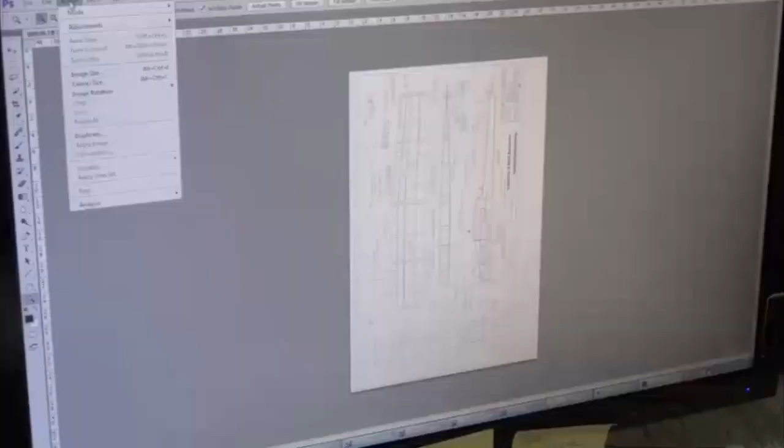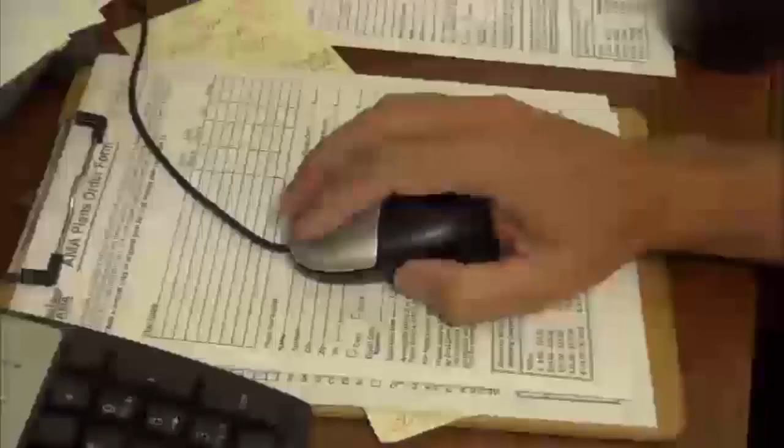After one final inspection, Greg includes any supplemental materials, such as this build article from Model Aviation. The plans are then rolled and packaged for shipping.

Great video, Greg. Tell me, what else does the AMA Plan Service offer? Thanks, Jay. We can do reductions and enlargements of plans. We can also do reverse plans. If you only have the right wing half on your plans, you can reverse it and put the left wing on there also. We also do plans repair, or we can do reconstruction of a set of plans.

Plans are in an archive, so we have a lot of experience. We also have access to the Model Aviation Museum library, which has thousands and thousands of old magazines we can pull the articles from and reprint them with the plans.

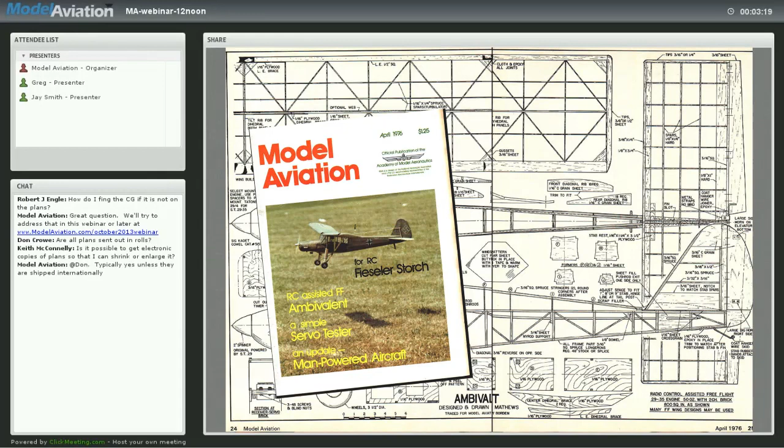One of the questions that I see here online is, how do I find the CG if it is not listed on the plan? CG is usually circled. It's like a round circle that's in quarters. That represents a range of CG to the lead edge and to the trail edge of that circle. If you're in that circle, you're good to go. Thanks, Greg. Let's get down to your presentation on how to select a good set of plans.

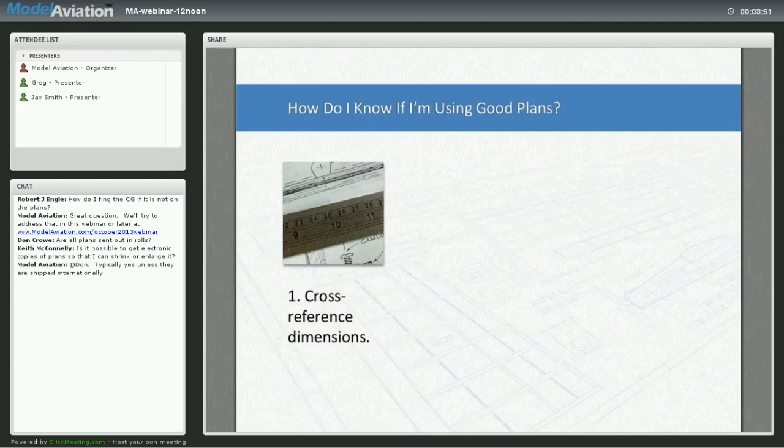Okay. With any set of plans, you first want to do a cross-reference of the dimensions on the plan. This is the Scratch 1 from Bob Aberle. Notice the dimensions match and are accurate. Wing chord at the fuse matches the wing chord of the wing drawing up there at the top of the wing. Check that with the ruler. If they both match, you're good to go.

Compare the left and right wings. They should be the same width. You can also check the distance of the ribs throughout the length of the wing. Those should be fairly consistent. One cautionary note: if there's only the right wing on the plan, don't build two right wings. Your plane won't fly very well at all.

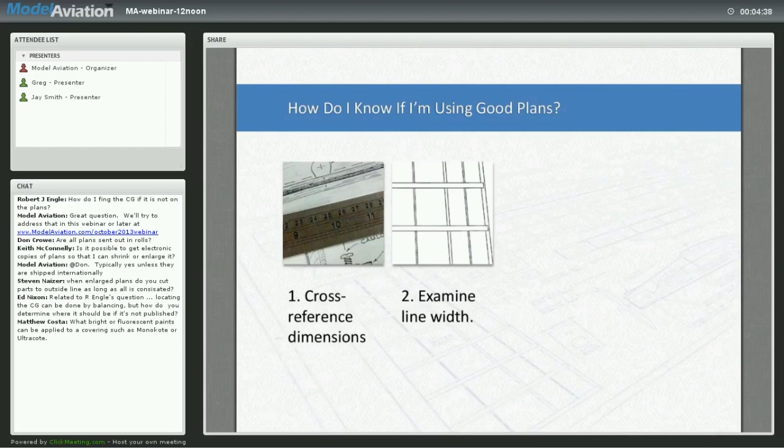Second, before building from a set of plans, be sure to examine the line width. If it has a wide line width, choose either the center or one of the edges of the line. Make sure you are consistent throughout the plan. If the plan has been reproduced several times, or it's been blown up and enlarged, the line is going to be fairly large.

Good. Real quick, it's asking here, you mentioned enlarge. It says when the plans are enlarged, do you cut on the outside of the lines? That would be a good idea. You can do it on the outside or the inside or in the middle. Just be consistent throughout the way you select your line. Okay, a good quality print will have even, clean lines.

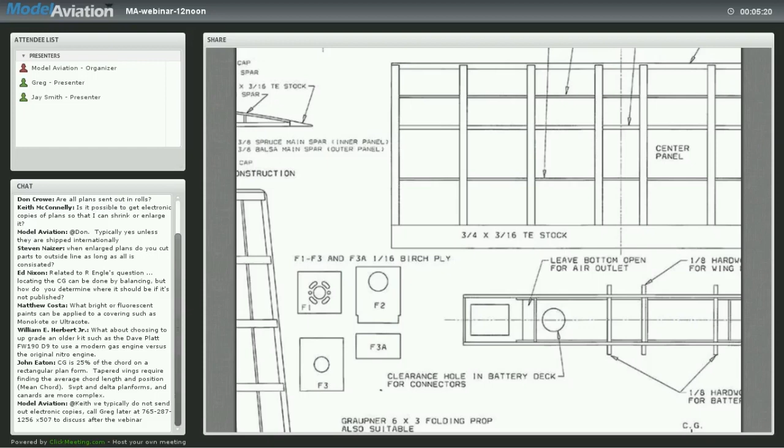Sloppy lines or inconsistent line thickness mean a bad print job or a bad print design. Place a straight edge along the spar. Spars are generally always straight. Usually either the lead edge or the trail edge will be straight also, so use that as a reference. You can also, on this plan, see that there's a reference line through the center of the fuselage. Put a straight edge along that, make sure it's nice and straight.

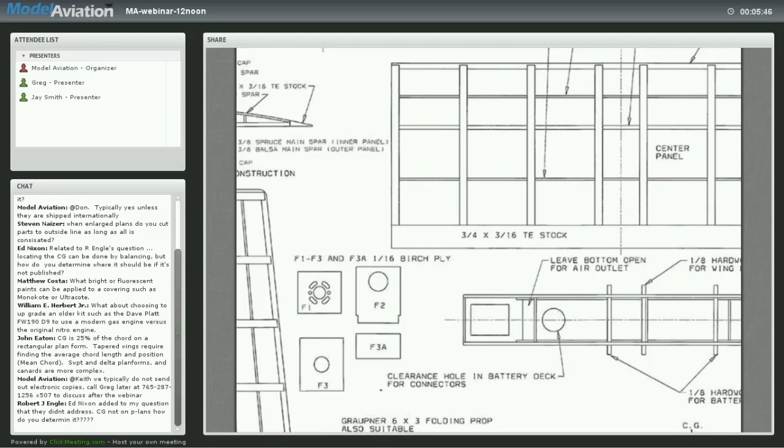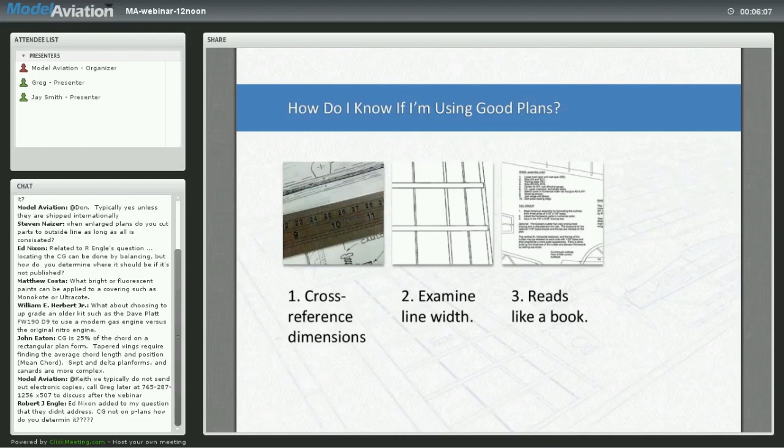After your plans pass the first two tests, the dimensions are consistent and the line width is even. Third is make sure your plans read like a book. The designer did what he did. Read the article all the way through. Make sure you understand what his design tried to accomplish. Often the more details, the better.

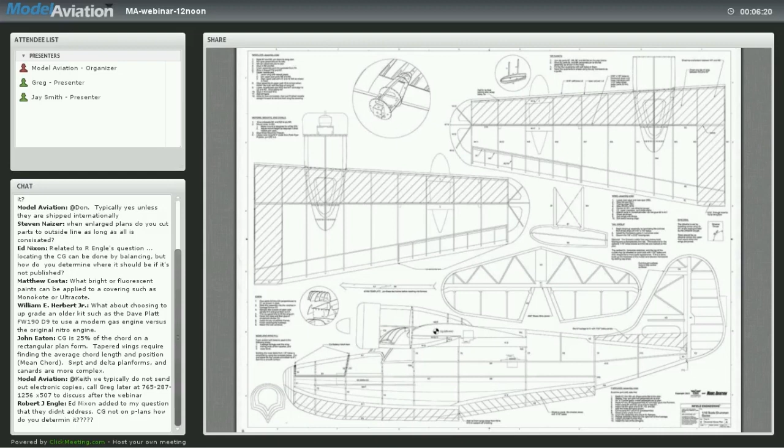The Grumman Goose plan is one of our more popular plans. In addition to good dimensions and fine lines, it also reads like a book. The plan service offers a second set of plans for half price, so you can use the second set of plans to actually cut out the plan outlines to use to make your cuts with.

As you can see, when you tackle each section of the build, you're given clear instructions. In this close-up, you're given step-by-step wing assembly instructions and tail group instructions. Throughout these plans are helpful hints and tips so that you can have clear directions.

Finally, you want plans that have stood the test of time or have been published in a magazine. Jay, you want to talk about how a plan is selected for publishing in Model Aviation? Sure. Obviously, we get a lot of plans submitted to Model Aviation magazine to be published, and it's very important to us that there's a good article to go along with it to walk you through the build process. It's also very important that the plans are of high quality and easy to build from.

So as one example, with the Grumman Goose, we're looking to have short kits, working with companies within the industry to provide short kits to allow you, if you want to build one of our plans, to then be able to get a short kit, which will hopefully save you some time and effort and further promote building.

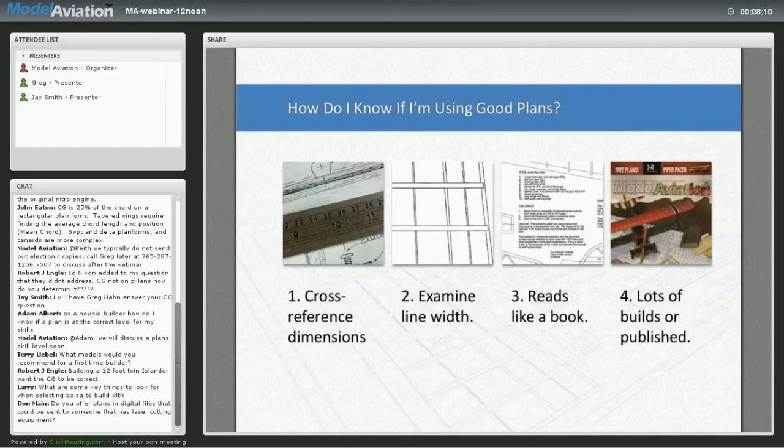Back to the Model Aviation plans. Each plan is shipped with the original article from the magazine. Plans that have been published in a magazine have been built; the plane itself has been built. That's why you see the picture on each article that was published, so you know that a physical copy of the plane has actually been built. This assures that you have a final aircraft that will fly.

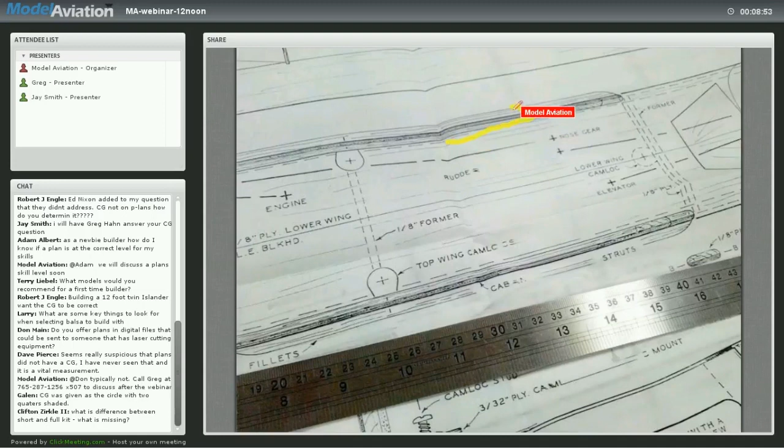Okay, now let's look at some bad plans; we see those occasionally. Here's a rare example of a plan from the Pond collection that we had to remove because it was so out of whack. As you can see, look at the wing rib there in the middle of the fuselage. It was stretched an inch and a half. We tried to fix it, but it turned out throughout the rest of the length of the plan that there were more inconsistencies as we went along. This is an example of a bad plan you hope you never run into.

This plan does have a lot of detail and reads like a book, but this plan does not have consistent dimensions. You can see that blur there above the 13-inch mark on the ruler. The line weight is uneven. There's not a straight line on the plan.

These plans were from a kit that was produced a long time ago. So they've been reproduced many times, and a lot of the reproductions were not done well. During the scanning process, you see the plan stretched, creating a skewed image. This offsets all the dimensions, ruining these plans. We tried to repair it, but dimensions were off in other areas also.

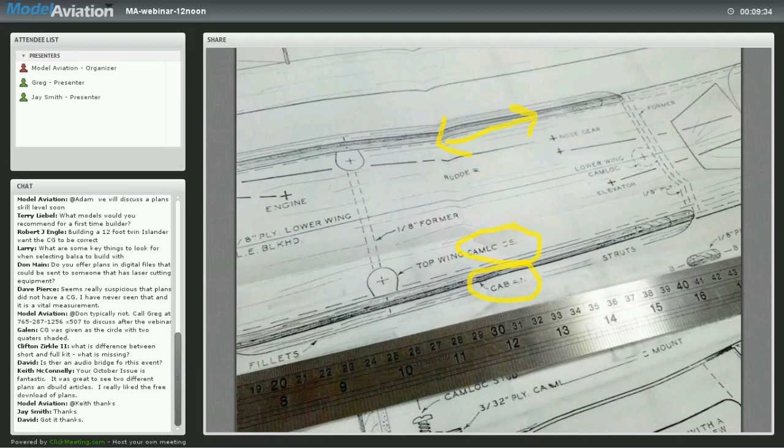We have 18,000 plans at the AMA. I encourage anyone interested in building from our plans to talk to me directly before buying a plan. Not all plans are created equally. Some are much harder to build. For example, a 3-view is harder to build from than a build plan or a plan from a magazine.

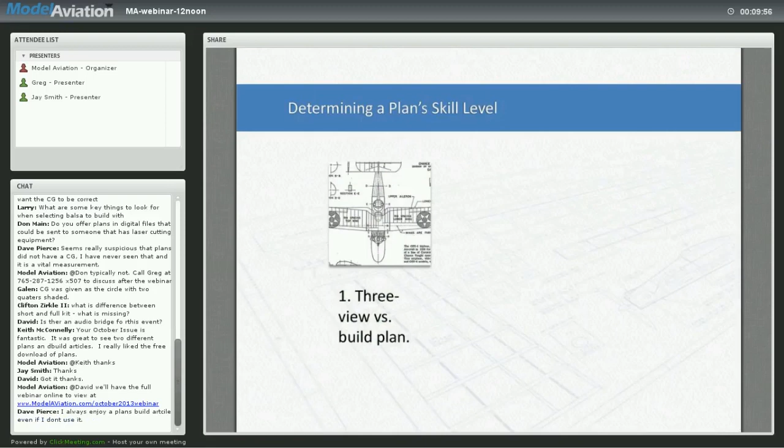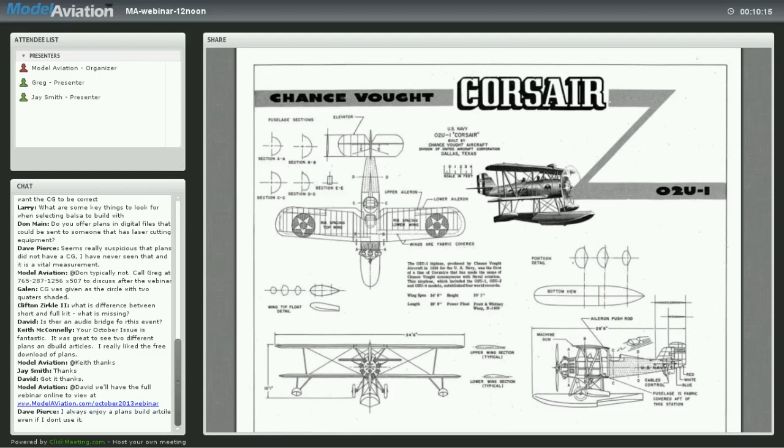This 3-view plan does not read like a book, does not have all the details, nor was it ever intended to be built as a model. But you can still use it. You need a 3-view if the plane was never modeled, or you need to make a plane with exact scale outlines or for scale competition. This plan does not read like a book.

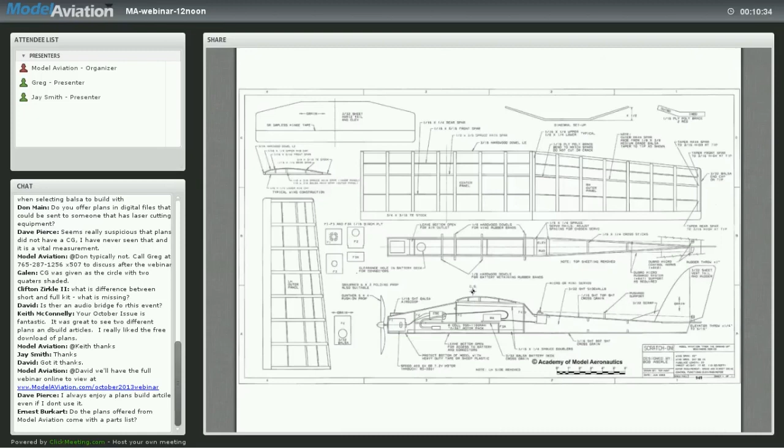It also passes the tests we listed earlier. It does have consistent dimensions. It does have even, nice lines. It does read like a book. It was tested and even published by Bob Aberle. This is called the Scratch 1. It was based on a series of articles in Model Aviation for learning to scratch build. These are available at modelaviation.com in the archive section.

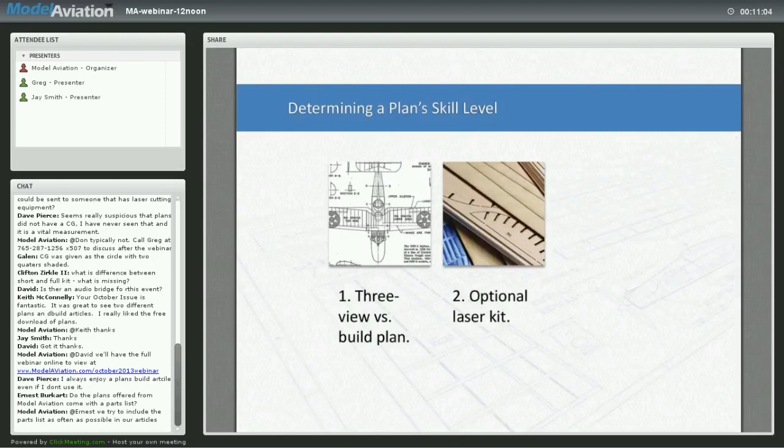Secondly, you want to try to build from plans that offer a laser kit if you can find one. The Grumman Goose has a laser kit. It has almost 100 very small intricate parts that you would not have to build yourself. And it's available as a short kit versus a long kit, which has all of the long stringers involved. So you can use a short kit or a long kit. A long kit would be more expensive.

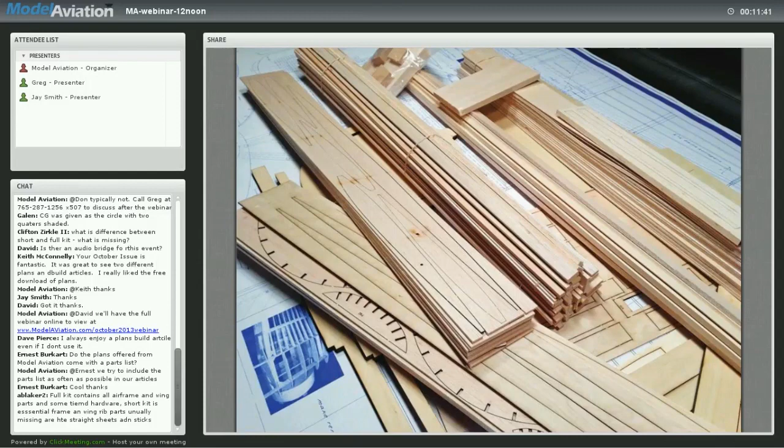Try to find a plane with fiberglass parts that are available. There's Fiberglass Specialties that are still in business. They have fiberglass parts for a lot of old plans. A laser kit removes the burden of trying to buy the right weight and grade of wood. It also carefully and accurately cuts each piece to the exact size you need. If you're new to building, this may cost a little more, but saves you hours of work and frustrations. But not all planes have short kits available.

Here's a view of the Mr. Mulligan built with laser cut parts. It's a beautiful plane. I hate to cover that.

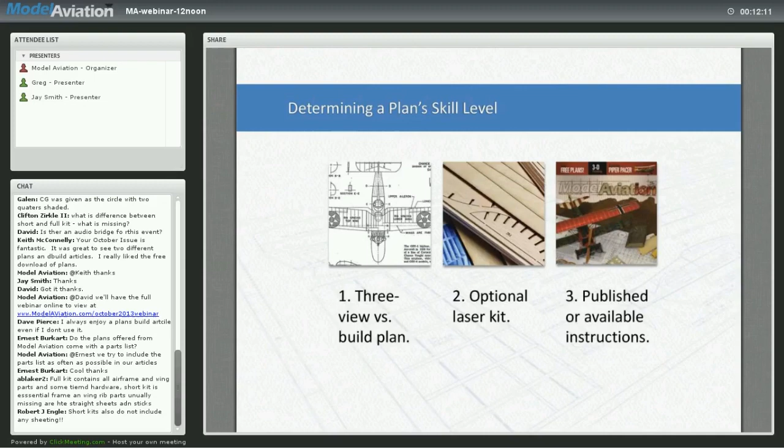Newer builders will want plans that are published or have instructions, like plans published in Model Aviation. These instructions will walk you through step-by-step every phase of the project. It may have the contact email of the original designer. Feel free to contact him. It also helps to join a club or partner with a more seasoned builder for additional techniques. Whichever route you decide to take, the end result will be a plane you will be proud of.

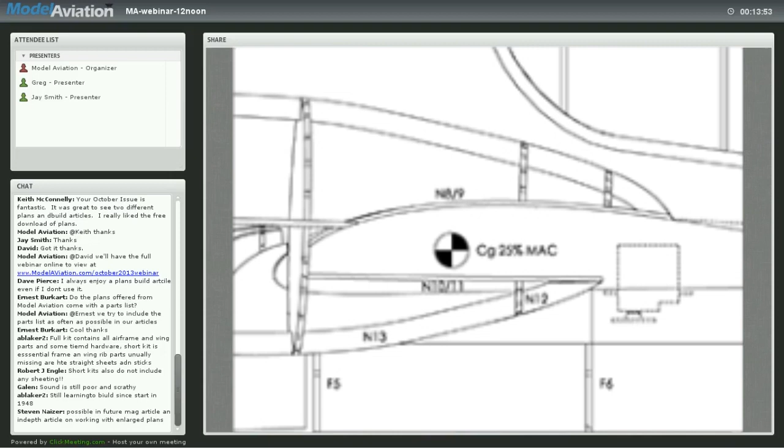Greg, before you get into your presentation, one of the questions I saw here online was how to determine the CG if it's not marked on the plan. I saw that question, and I was going to say if I had time at the end, I'd address that. It can be a little lengthy because it mainly depends on the wing planform where you find the CG. Normal CG of your average aircraft is going to be between 25 and 27% of wing chord. So normally at the root, where the wing hits the fuselage, you're going to measure the root chord. You're going to percentage that back 25 to 27%, and that normally gives you your CG on a rectangular wing.

And when you get swept wings and you have swept leading edge, swept trailing edge, then you go to 25 to 27% of mean aerodynamic chord, and you have a mathematic equation to figure that. So that's something you almost have to do visually, but normally 25, 27%. On a warbird, I like to be closer to 25% because I want the nose pointed down when you pull the power back. Some of your other aerobatic planes fly a little better with a back CG. It makes them more aerobatic and a little easier on the flight characteristics.

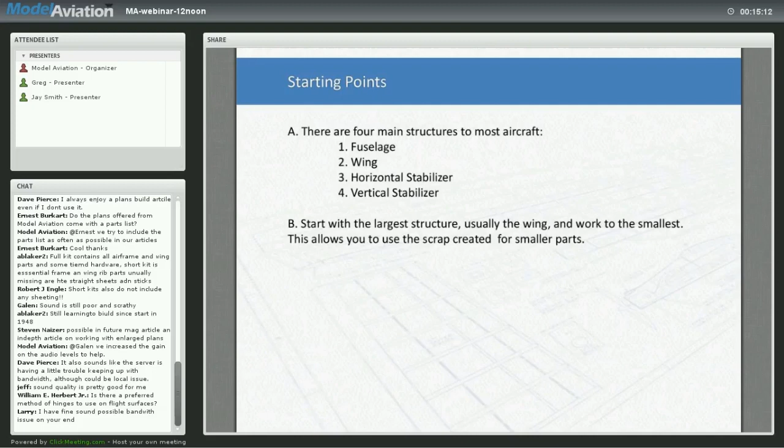But now that we're ready to get into our build, let's get started. We're actually going to start cutting parts and smearing some glue around. The first thing is there are four main structures to any aircraft: the first part being the fuselage, second part being the wing, then you got the horizontal stab and the vertical stab. Those are the main four parts of any aircraft. When you start a build, normally I recommend starting with the largest structure, which is usually the wing, and work to the smallest.

Main reason for that being that as you create scrap by cutting your parts and cutting your sticks, you're going to end up being able to use that scrap as the smaller parts when you start building the smaller parts, and you're going to be a little more efficient with your material.

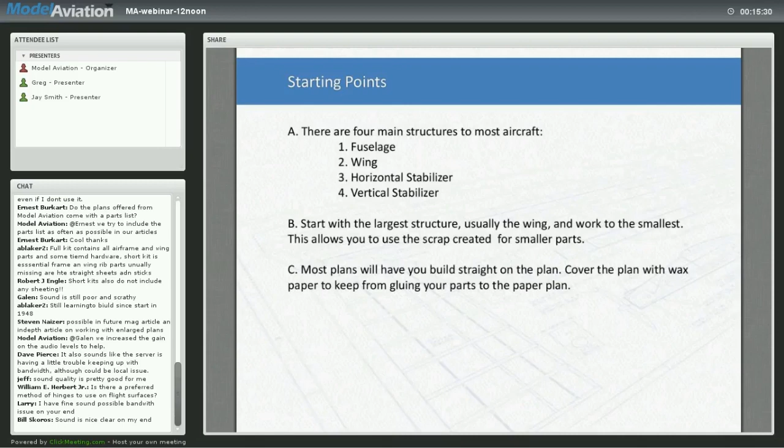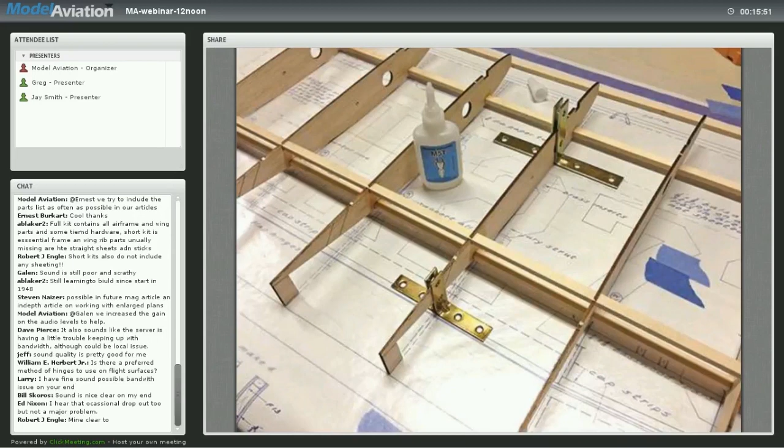Most plans will have you build straight on the plan. I normally cover the plan with wax paper or some type of Mylar or whatever it takes to keep the glue from sticking to the paper. And here's a picture of what I'm talking about, where you're actually building on the plan. It also helps cut your parts the right length without having to do a lot of measuring, and it speeds up the building process all the way around.

Next, you have all the parts necessary for the structure you're building ready when you get ready to start. If you've got formed parts or you have cut parts and your sticks, you kind of get an idea of how many sticks you're going to need to build the wing or whatever you're building. Try to have all the parts handy. That way you don't have to break concentration, go cut a part, and come back. It's going to make it flow a lot easier for you.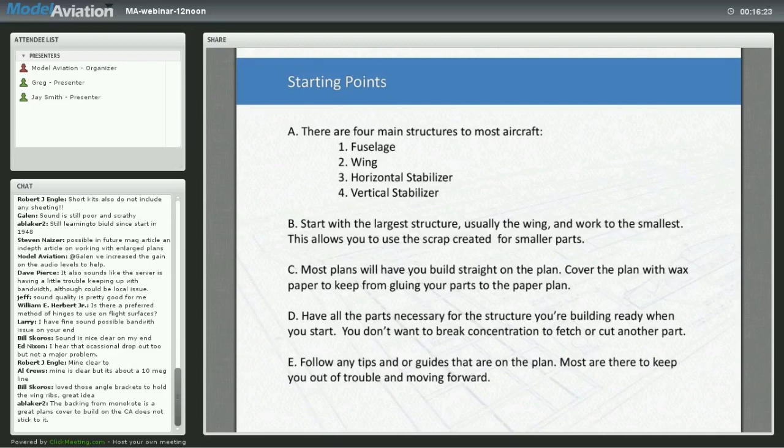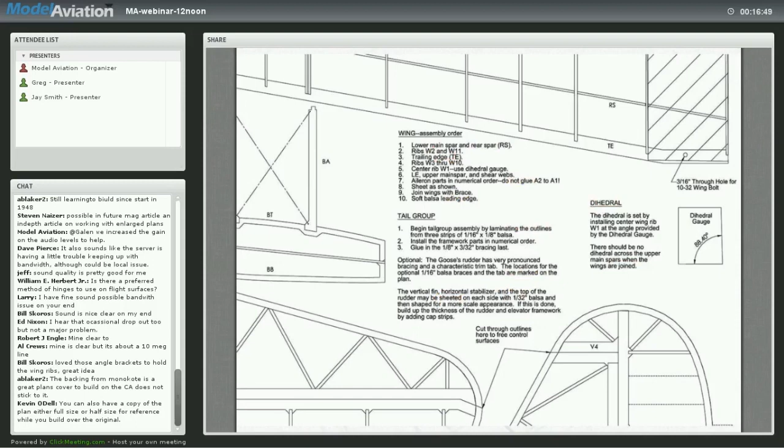And lastly, follow any tips or guide on the plan. Most are there to keep you out of trouble and moving forward. And as you can see on this section of a plan that I've got out here, if you follow my pointer up here, you've got wing assembly order, and the guy that drew the plans is giving you the sequence of events of exactly how to build the part. And it keeps you in flow and probably answers a lot of your questions. So always pay attention to anything that's actually marked on the plan itself, because they're always there to help you.

Next part, we get to the lumber and materials. Whether you're building a house, a model airplane, or whatever you're doing, you've always got lumber and materials. Sometimes the plans have call-outs, sometimes they don't. But there are three basic woods that we use for model building. First being balsa wood, which is very lightweight and comes in several grades depending upon the weight. It sands easily and absorbs glue readily. It's the strongest wood by weight in the world and will make up the majority of your project.

I saw a question earlier about what grades of balsa I should decide to use on my airplane. It depends actually on the size of the airplane and the amount of stress in the area where the balsa wood is being used. The lightest and least strong balsa is called contest grade, which is very light, and then I've seen balsa where you could almost make a baseball bat out of it. So you mainly look at the area and decide on what strength or weight of wood is going to work in that area. You don't want a bunch of heavy balsa in the tail end of the airplane, so you want to keep that light. So it's kind of a thought process of what balsa to use.

The second wood that's normally used is plywood, which is a multi-layer cross-grain layup of usually birch or poplar plywoods. It's used for high-stress areas, mainly landing gear mounts, engine firewalls, and other small places that need to secure a wood screw. And it comes in various sizes, all the way from 1/64 up to usually 3/8, which is the maximum that we use for modeling.

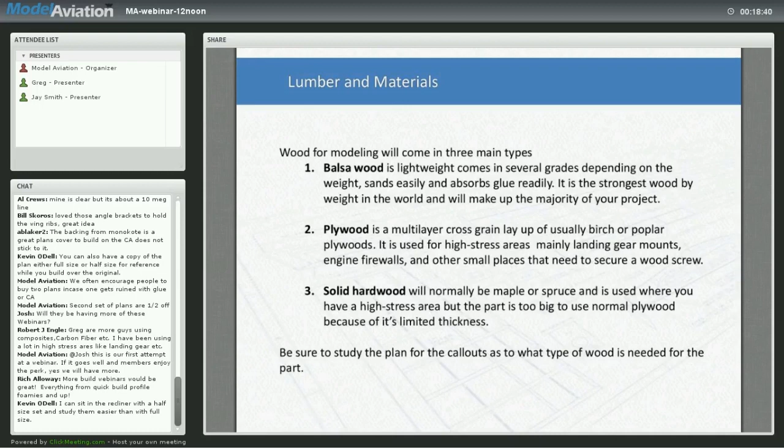And so always look on the plan if you're in question, and if the plan doesn't help you, then think about what you're actually going to be doing with that part. Okay, there's two main parts that you see on an aircraft plan. You have cut parts and dimensional parts. Cut parts are the ones that will normally have a template, or the outline for them will be somewhere on the plan, so be sure to use it.

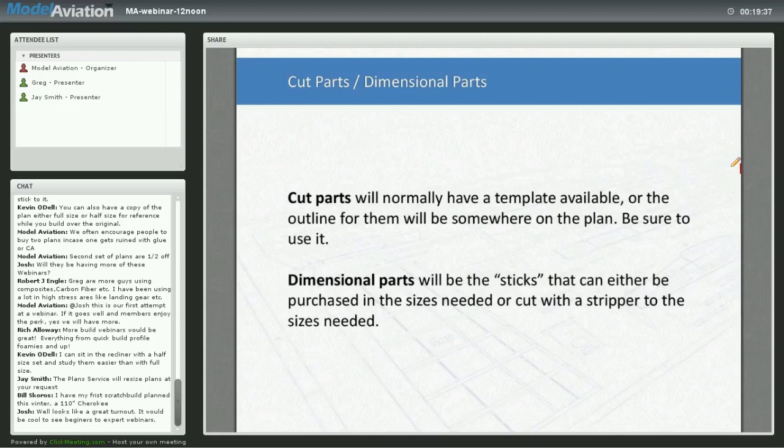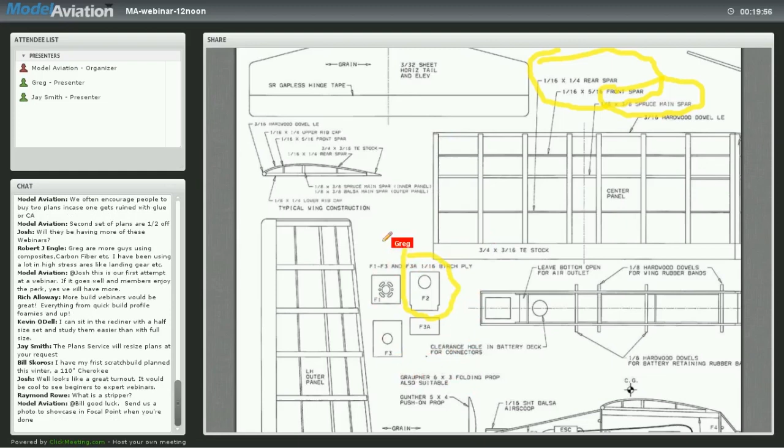Dimensional parts will be the sticks that can either be purchased in the sizes needed or cut with a stripper to the sizes needed. I'm going to back up to the picture that I just had, and down here in the corner off my pointer, you're going to see a template for a cut part, which is a fuselage former. And so you're going to find these in different places on the plan, so you're going to want to mark them and make sure you don't miss them, because they're going to be very heavily needed when you're building the airplane. But these are what we call cut parts. Okay.

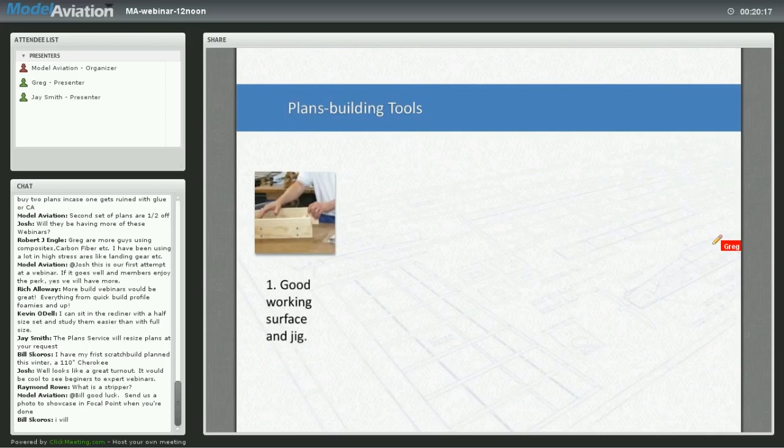In plans building, there's a lot of tools that go into this. A lot of them are specialty tools. Most of them are readily available either at a hardware store or at a hobby store. Some of them you're going to have to go to a hobby store for. And the first thing you got to start off with in building from plans is going to be a very good workbench. This is a picture of a workbench here that's not readily accessible to use pins with, but it's flat. And the main thing is to keep the thing flat. You don't want to build any warps into your structures, and if you start out from the beginning with a flat surface, it's going to help you immensely all the way through.

Normally you're going to cover this with a piece of Homasote board, which is essentially an acoustical ceiling tile turned upside down. You can stick pins in it, and it'll take the shape of the board that it sits on, and it works pretty well that way.

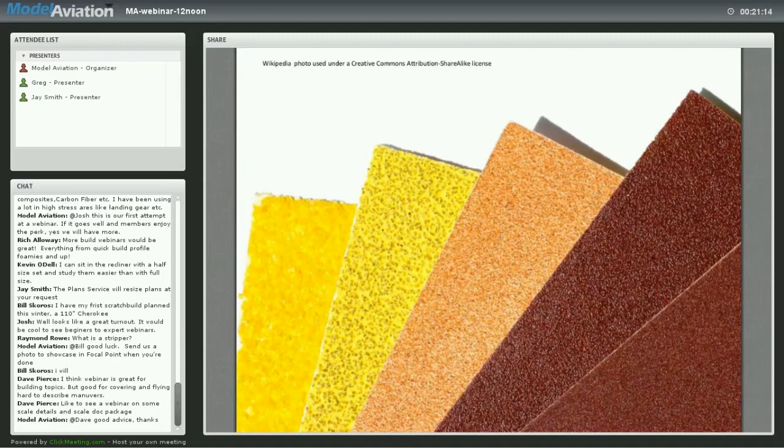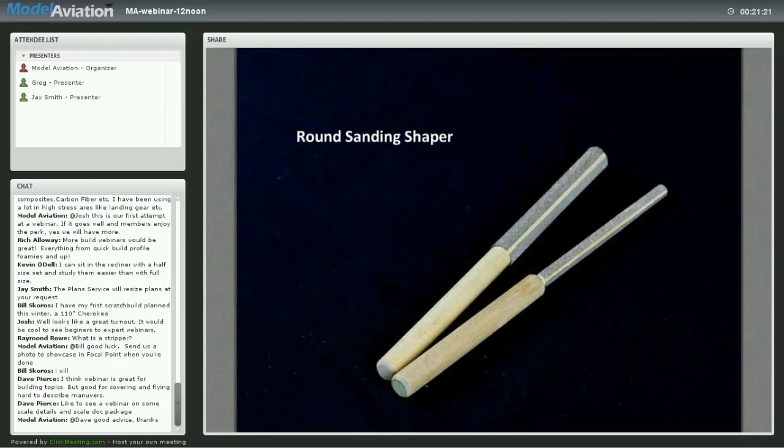The next thing you're going to need is sandpaper of a lot of different grades, and also square and round blocks, which you can use as shapers with your sandpaper. Sandpaper takes a lot of work. You got to be careful, because you can get sandpaper that's too heavy for the work you're doing, and so you've got to get used to using and deciding on what grades of sandpaper. And then there's also some sanding sticks that are available at hobby stores, which is what you're seeing here, different round dowels with grit sandpaper on them that you can use to shape your parts with.

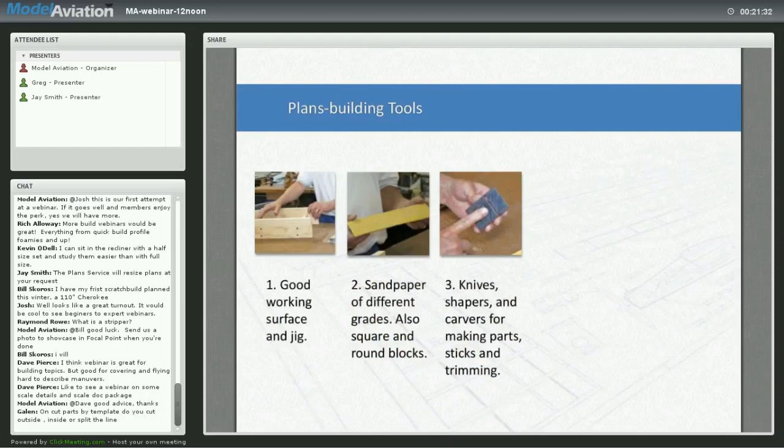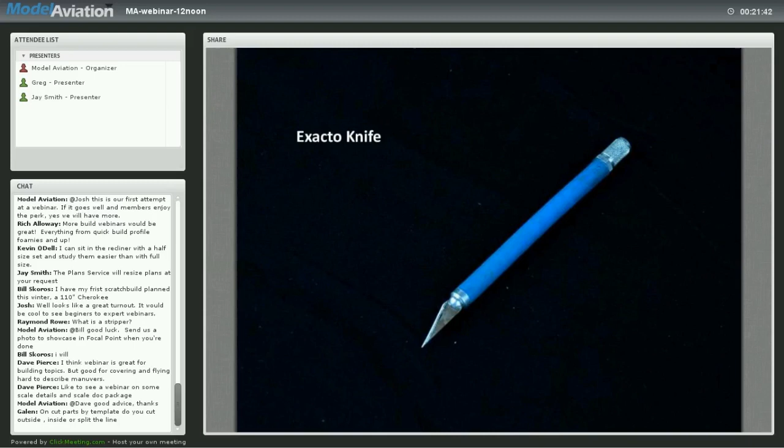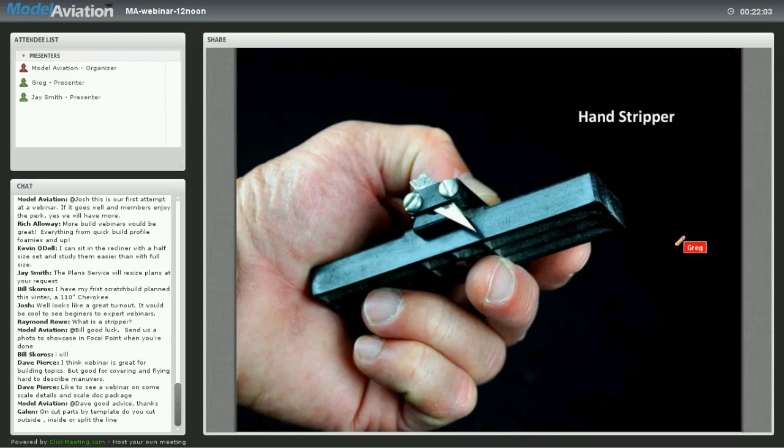The next set of tools are your knives, shapers, and carvers for making the parts, the sticks, and trimming. The first one I'm going to show you here is your standard X-Acto knife with a number 11 blade. This is the one you're going to use to death. It's one of the main modeling tools that was created a long time ago. Next is a hand stripper. This is an item that's available at your hobby store that has an adjustable width band, about where my thumb is. You can move it in and out, and you can actually take a sheet of like 1/8" balsa and cut 1/8" squares with it, or 1/8" by 1/4", or whatever you want.

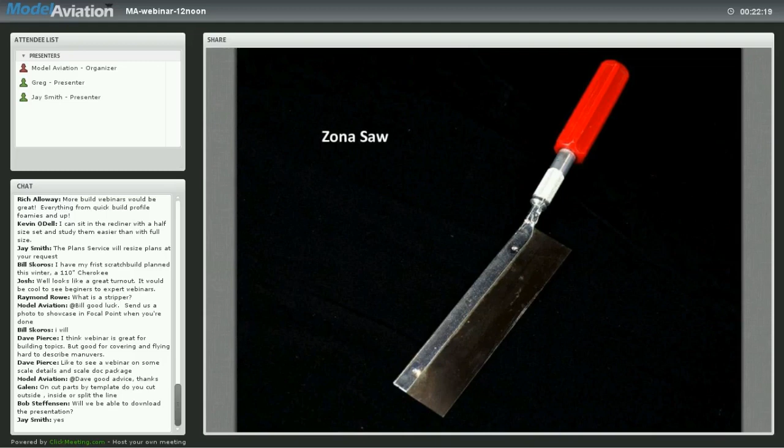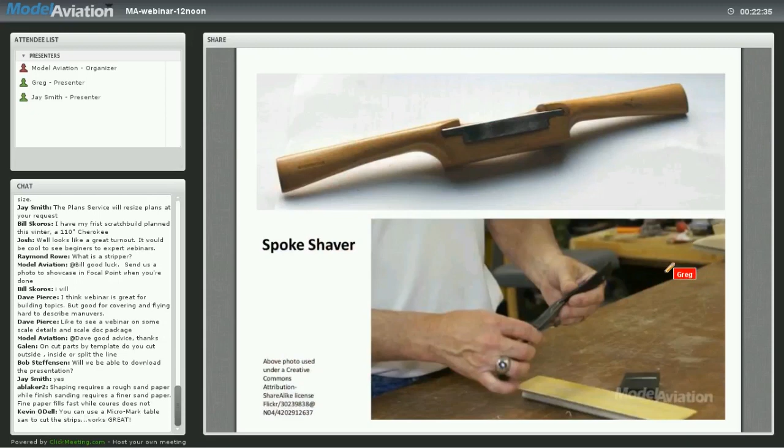The next tool is a Zona saw, which is going to help you cut the ends, and it's not going to crunch them or change the shape of the ends. You're actually going to get a good square cut so that it can absorb the glues real well. The next one is a hand razor plane you can use to knock the edges off if you need a round edge. A handy little piece that is also available at hobby stores. You've got a spokeshave. If you can find one of these in an antique store, they're really good for shaping hardwoods, because your razor plane doesn't quite have the strength to do that.

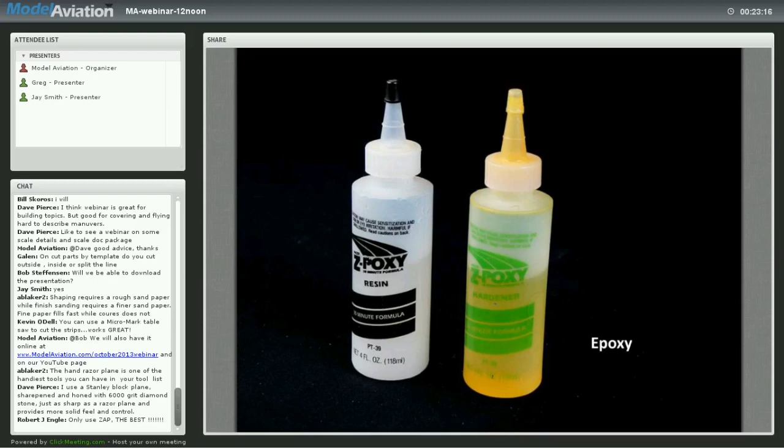Next you have your CA glues, which are your instant glues. They absorb into the wood well, make a good bond, and what you've got here is a thin and a medium, and then the kicker that you spray on to speed up the cure even faster. The next glue is the white glue, and it's an air dry.

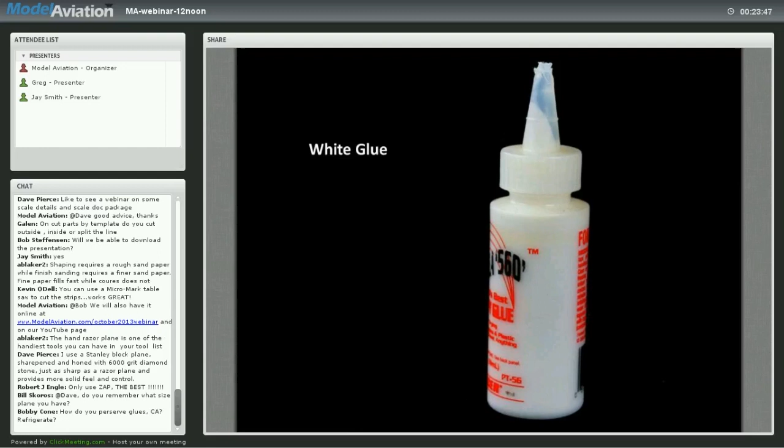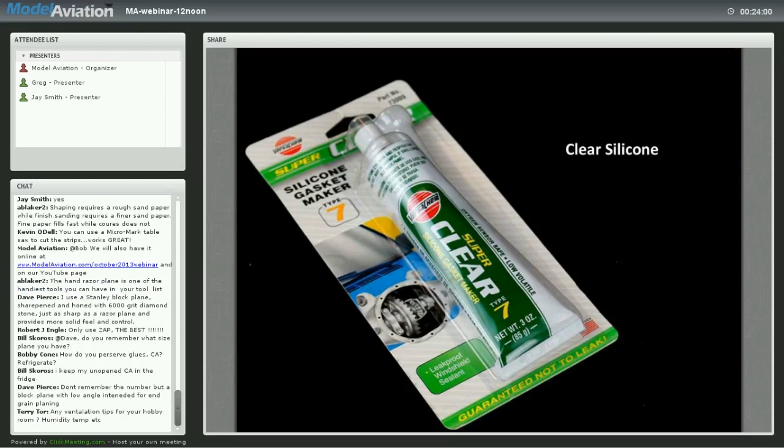Takes a long time. Back in the day when I first started, that's all we had. So you'd glue up 5 parts and go away for a couple hours and then come back. Nowadays we have CAs, but white glue also works well in high strength and high stress areas. I also use a lot of clear silicone glue, which is actually a caulk, but it's actually an adhesive, and it stays flexible. So if you need a place that needs to stay flexible, you use the silicone, and it doesn't turn into a hard spot for you.

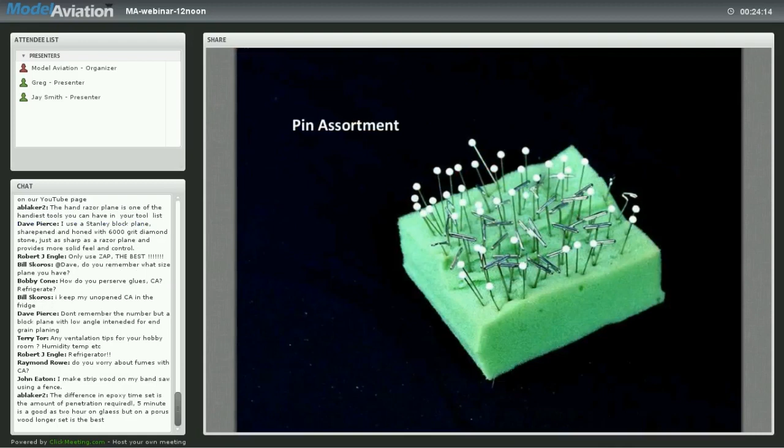Okay, other miscellaneous tools, you're going to need pins, a different assortment of pins, and you can go raid your wife's or your mother's sewing room and you get everything you need there. And here's a picture of pins being used, and then an aluminum straight edge which doubles as a ruler is a handy item to have so you can cut your parts. And so that pretty much finishes up my end of the first segment of getting started with the tools and the glues and getting rolling.

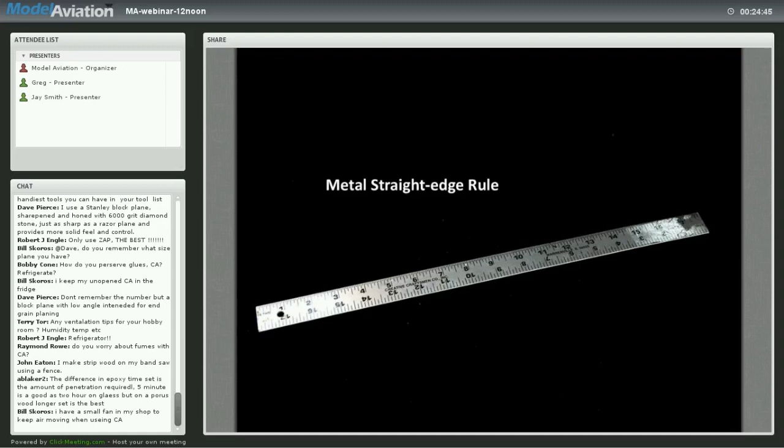Thanks, Greg. I've been watching the questions online, and I'm going to hit you with a couple here real quick. One question is about ventilation. Do you use any kind of ventilation either when you're sawing wood or with using the adhesives? Okay, ventilation, it depends on your situation. In my shop, I don't have a dust vac or anything like that. What I normally do in my work area, I keep a fan going all the time, either from the right or the left or whichever, and I keep windows open a lot. Some people are affected by both epoxy and CA, which can get into your eyes as far as the fumes and cause you some irritation. If you keep a fan blowing right next to you while you're working, usually it keeps the fumes or anything away from you. Excellent.

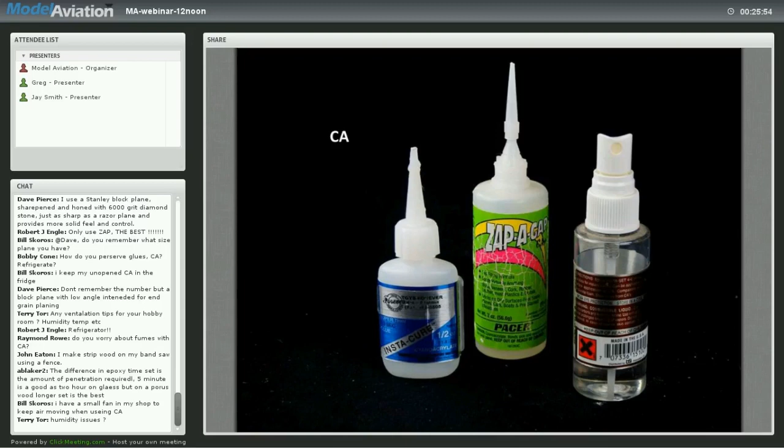I also saw a question on here about the best way to store CA. I put mine in the refrigerator. Do you have any tips on that? CA, yeah. The best place to store it is in a refrigerator. If you're going to store it for long periods, like 6 months to a year, if you buy 10 bottles and you're going to put 5 back, you can put them in the freezer. Literally freeze them. It extends the shelf life by about double when you freeze them. But keep them in the refrigerator, and keep them out of moist environments because it will set up in the bottle on you.

Thank you very much, Greg. You always provide us a lot of great information on building, and fortunately I get to go in your office and see some of the neat things you're working on. Greg has a very nice Corsair hanging in his office. He also has several boats that he's scratch built, so he's definitely an all-around modeler.

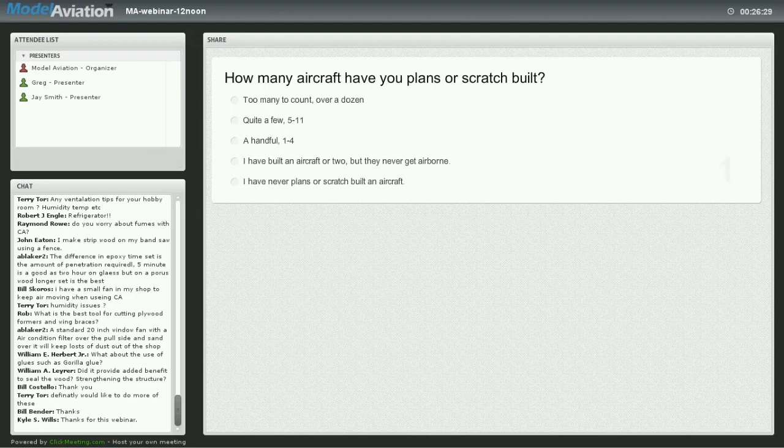Greg, it looks like there's a question here about other types of glues, such as Ambroid, if you want to touch on that. Yeah, briefly. I noticed that. Those are modeling glues, and they can be used. They're not part of the toolkit that I use because of what else is available. Ambroid is an older cement, and that was used heavily back in the 60s. It was one of the first lacquer-based glues where they actually used cellulose to create an adhesive out of it. Ambroid actually began back in the day when they used to melt photographic negatives and use them for glue because they were made out of the cellulose, which was a lacquer-based material.

But no, they work well. Sigment is an air dry glue, very similar to a white glue, just happens to be a different color. They call it aliphatic resin. So you can. There are many glues. I just don't usually use those in my toolkit.